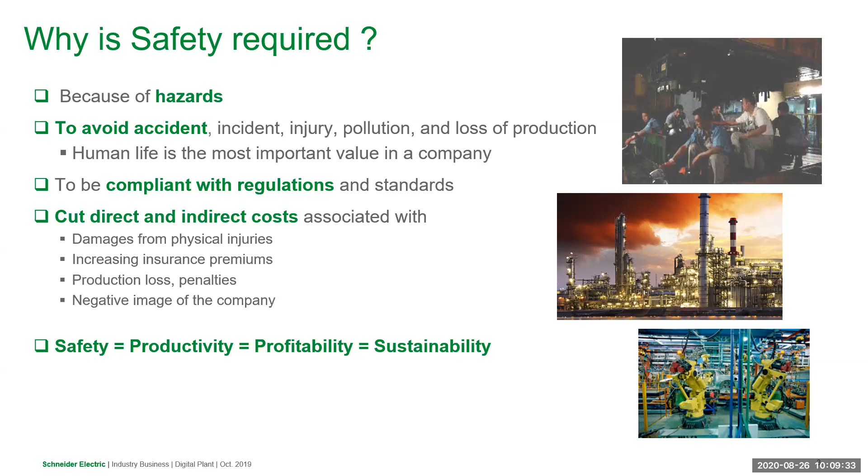More recently, in the last 15 years or so, risk analysis started to enter the equation. Monitoring systems were put in place to protect people and equipment, and these systems were external to the basic process and control equipment. That's how the concept of functional safety was really created.

As a general concept, functional safety is the part of the overall safety of a system or piece of equipment that depends on automatic protection operating correctly in response to its inputs or failing in a predictable manner. The objective of functional safety is freedom from unacceptable risk of physical injury or damage to the health of people, either directly or indirectly, through proper implementation of one or more automatic protection functions called safety functions, which is new terminology that we will be deeply covering during this presentation.

It is important to mention that functional safety is achieved when every specified safety function is carried out at the level of performance required for that safety function to be met. This definition triggers the following important definition: the safety-related parts of a control system.

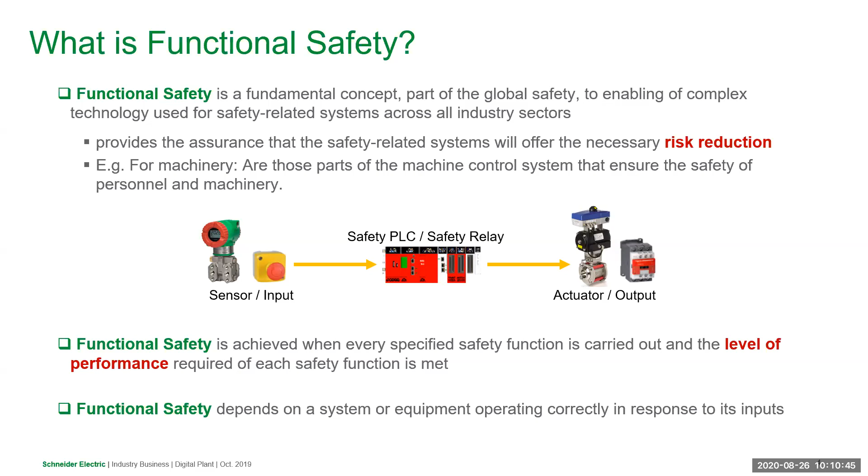The safety function will always consist of a function, a safety input device, a safety logic solver, and a safety output device or final control device. This is a must, this is always.

I want to comment here a little bit that I have seen in my experience in the market with different customers, talking about safety functions, mentioning safety related parts, and they are not always meeting this concept of the safety related parts. I have seen just an emergency stop, a really safety product, but going directly to a standard controller and having the actuator as a standard contactor, as an example.

And they are claiming, in some cases trying to claim, that there is a safety function around. Just by having standard products, in many cases, in all the cases, it is not achieving anything - they are not really meeting any standard for safety. They have an input which is safety, but they may have a logic that's non-safety and an output that's non-safety. If one of those pieces is not a safety product, not safety rated, they are not really achieving any safety rating in their safety solution.

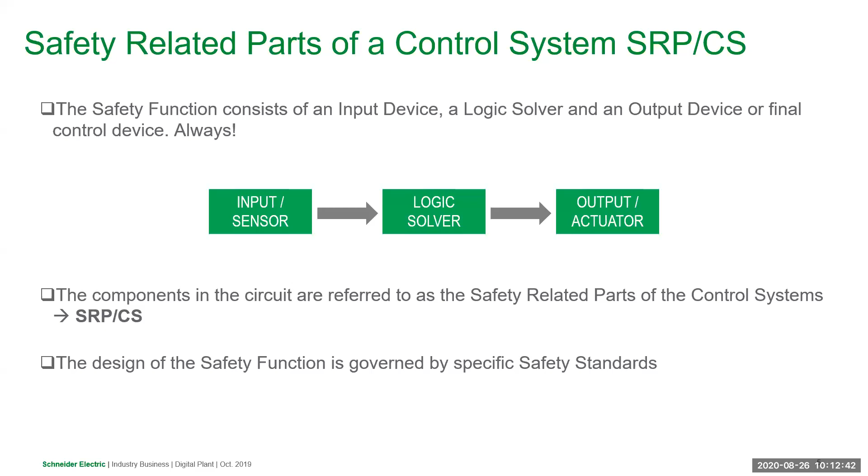Just as a comment, because I think it's important, and I have seen that - you will learn what is behind those safety components. So the components in the circuit are referred to as the safety-related parts of the control system, and the design of the safety function is governed by specific safety standards, which we will cover during this session.

So following with the presentation, I'm going to talk now about the standards, the safety standards, the functional safety standards. The standard is important - it lets everybody know and provides safety requirements. The standards provide guidance, guided by principles for design and integration of safety-related parts of control systems.

So in terms of safety standards, you can see on your screen the 61508, the IEC or EN 61508, which is considered a basic or umbrella standard for functional safety. It is a generic safety standard dealing with the functional safety of electrical, electronic, and programmable electronic systems, irrespective of the application. That is an important word here.

61508 is the main standard on the functional safety of control systems. So from 61508, used as an umbrella, we can see other different standards based on different applications.

Just by this presentation or webinar, I will concentrate on 13849, which is applied to all control systems, very applicable to machinery. But it's also important to highlight 61511, which is mainly focused on process, and 62061, which is also applicable for machinery, but it's used in SIL, which is safety integrity level.

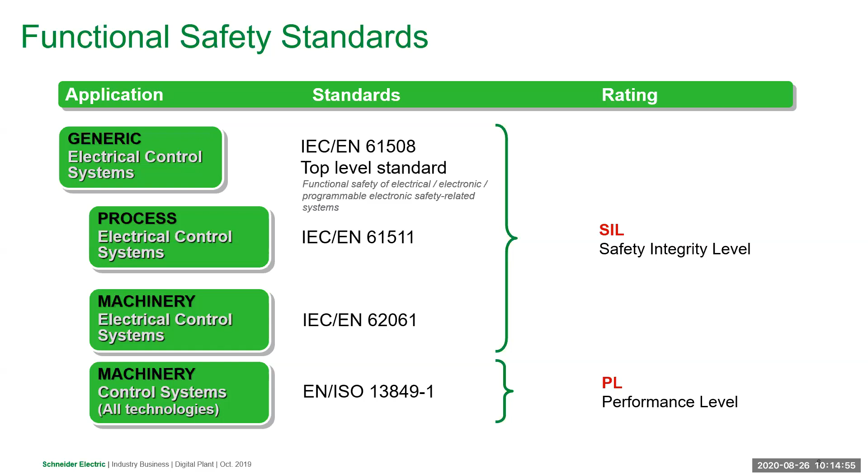So what is the difference? Let's start talking about the differentiation between process and machine safety.

If you work in a high-risk industry, it is very likely that you have heard the terms personal or machine safety and process safety. These types of safety measures have similarities, but they also have significant differences that are important to recognize when protecting the workforce. Process safety focuses on preventing fires, explosions, and accidental chemical releases in chemical process facilities or other facilities.

Dealing with hazardous materials such as refineries and oil and gas production installations. Machinery safety focuses on preventing employees from hazards, specifically coming from moving machinery. I will say that is the main differentiation, but both machine and process safety revolve around injury and hazard prevention, but on different scales. So hazards and risks are different, but the risk reduction methodology is pretty much the same.

For both, we go through the risk evaluation, which can be a risk assessment or hazard assessment. We have different types of risk evaluations. We go next to risk management, and after that we do the design, the testing, the operation, and the maintenance.

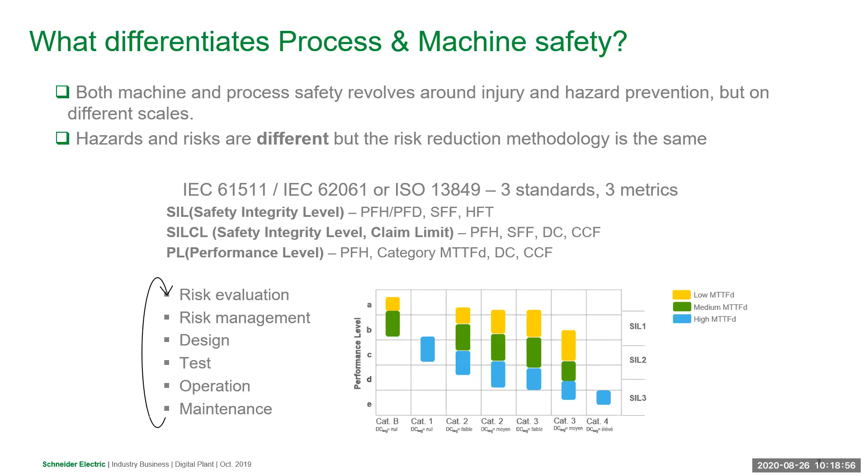That's why it is important to use safety products, because when you try to get some of this data from standard products, many times it is almost impossible to get it, because they are not built to comply with safety standards. That's why my recommendation on safety related components, if you want to build safety functions and you are talking about safety, is to go to standards and select safety components in order to get all this information.

So we have the two standards that I already covered, talking specifically about machine safety. If you recall, we have 13849 focused on performance level, and we have 62061 covering SIL. Both address the functional safety of machinery and control systems.

I will say the difference is that one will include other technologies than electrical, which is 13849, while 62061 is only used for electrical and process sector. That's why, in my experience, I have seen customers—and because 13849 is an international standard, I will say that 13849 is the most common or usual choice for many OEMs here in the US and other countries outside of Europe.

Even in Europe, in many cases, I have seen some OEMs building machines trying to comply with 62061, which is good, right? But they use the international standard. Now there are some harmonizations around the world, so the preference is to use 13849, the latest version of which was released in 2015.

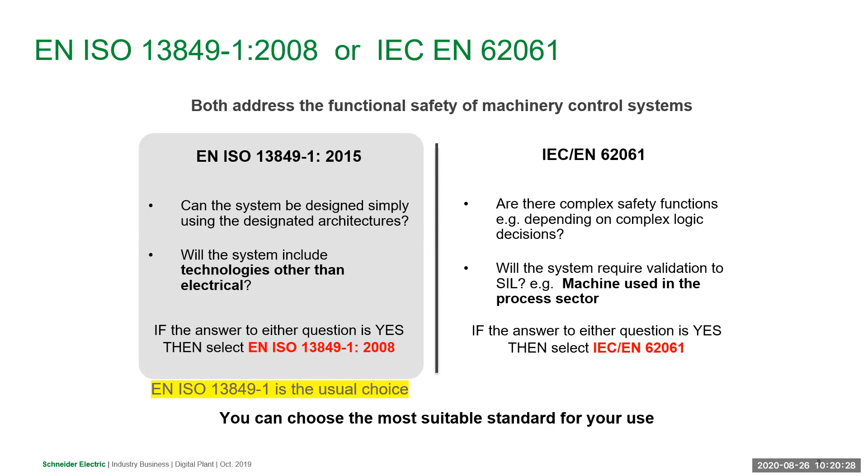Going back a little bit, in 2011, for those in the audience who remember, the safety standard EN 954, when we were talking about categories, this standard was valid until the end of December. Today this is an obsolete standard, but it's important to recall because it was the basis for the category portion in 13849.

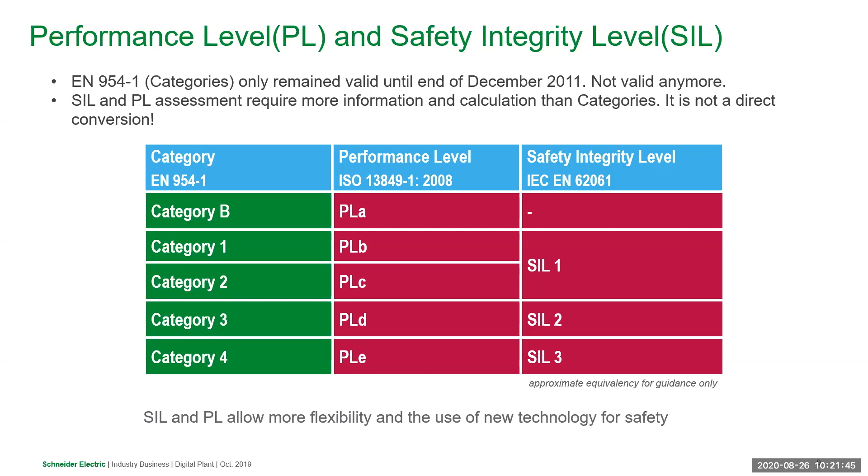EN 954 was replaced by safety integrity levels with 62061 and performance level by 13849. However, categories are still used. There is no direct equivalent to safety categories, and they require additional information and calculations that I will show. From here, I'm going to start talking about 13849, which is the usual global choice since it's an international standard.

We added three different requirements or components to achieve with 13849. One is what they call the mean time to dangerous failure. The other is diagnostic coverage, which is simply the ability of the system to detect dangerous failure. And finally, the common cause failure, a systematic fault that could affect both channels in a redundant system.

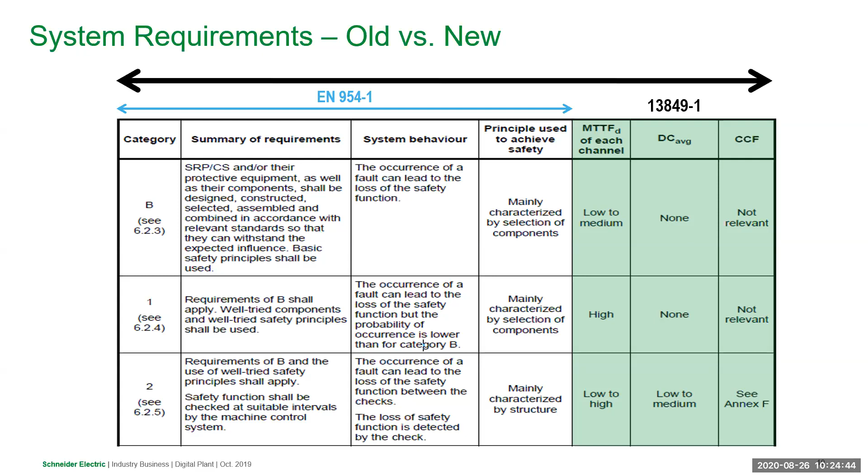So let's talk now about these additional requirements a little bit more in depth. This is the summary of the three additional components, as I just mentioned: the mean time to dangerous failure.

This is the portion of failure modes that can lead to failures that may result in hazards to personnel, environment, or equipment. In simple terms, it is the calculation of how often a piece of equipment or safety system fails in a way that threatens the safety of workers. This data is typically provided by the manufacturer.

I'll show you a summary in the upcoming slides where you can see all the details, but it's important to note that MTTFd is typically provided by the manufacturer in different ways. If you don't have the MTTFd as is, manufacturers typically provide other data that can be converted to obtain it, which is a requirement for the math calculations under 13849.

So MTTFd, the mean time to dangerous failure, is given in three different levels, as you can see: low, medium, and high.

It goes through different years. In terms of the failure, you will see theoretical figures quoted in some cases of 3,000 years in your calculations. But typically in calculations, these are capped at 100 years.

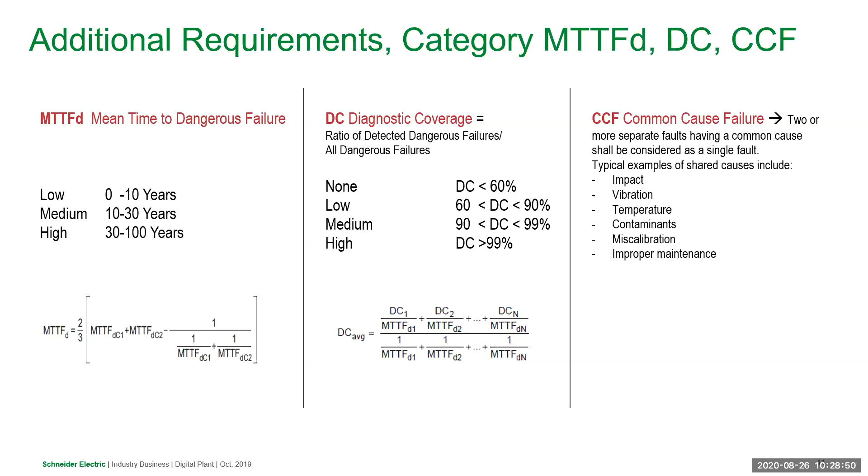As I just mentioned, I have this table. I think this is a very useful table for quick reference. This is a summary of the basic requirements of 13849, not including the category. This table includes the requirement, explains what it is, how it is applicable, how it is measured, and how we can get this information. So it is important to understand this if you are designing something under 13849. To really have a good understanding, more information is under this standard.

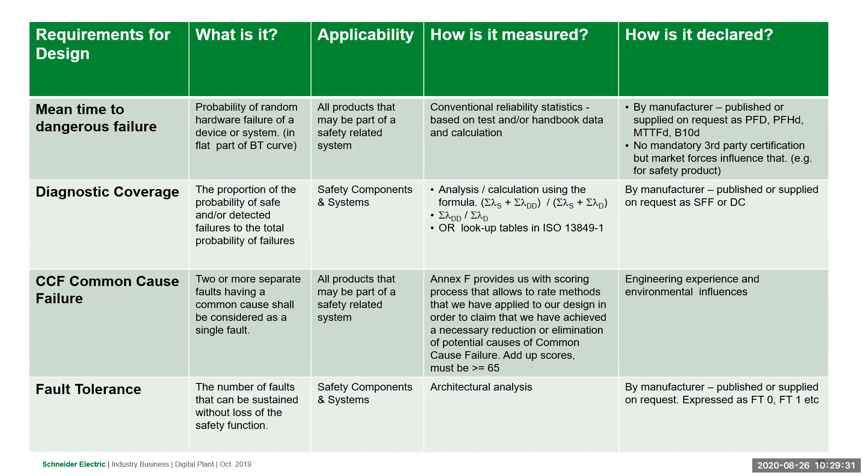So continuing with the presentation, now let's talk about the implications. As we just learned, 13849-1 encompasses more parameters to be considered based on reliability and time. But there is an important step in the safety life cycle, which begins with the identification of a risk or hazard.

There is an international standard for this, typically used, which is ISO 12100:2010, on safety of machinery. It covers general principles for design, and includes risk assessment and risk reduction. This standard specifies basic terminology, principles, and methodology for achieving safety in the design of machinery. It specifies principles of risk assessment and risk reduction to help designers achieve this objective. All of these principles are based on knowledge, experience of design and use, incidents, accidents, and risks associated with the machinery.

So risk assessment criteria is defined and mapped to required performance levels. Estimating risk involves evaluating many aspects, including severity of consequences, what are the chances, and what is the frequency of exposure. Severity is important - it's about how bad the injury can be. Frequency is about how often the worker is exposed to the hazard, and avoidance is about how likely one will avoid being exposed to that hazard. So risk assessment evaluates the potential hazard in order to determine the required performance level.

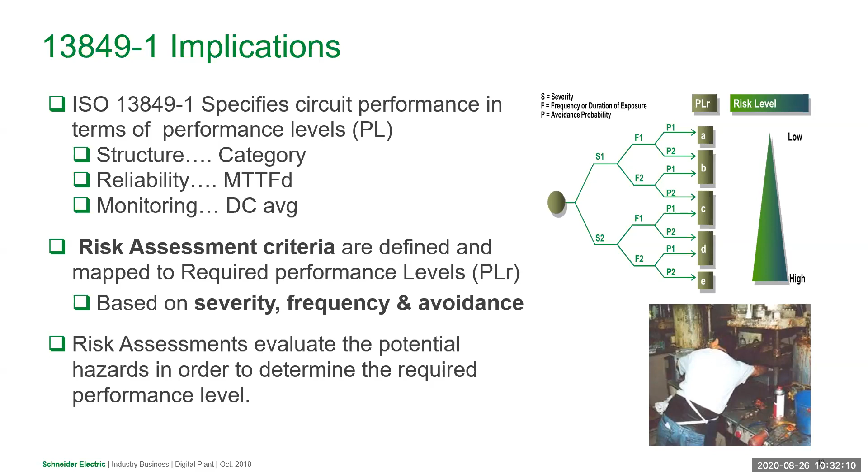As you can see in the graph, the three components under 13849 in a nutshell are severity, frequency, and avoidance. This mapping, which we will cover later, includes different levels of severity, frequency, and probability of avoidance that lead to different levels of performance level. As you can see, we have five, and all of them provide different levels of safety or risk, from low to high.

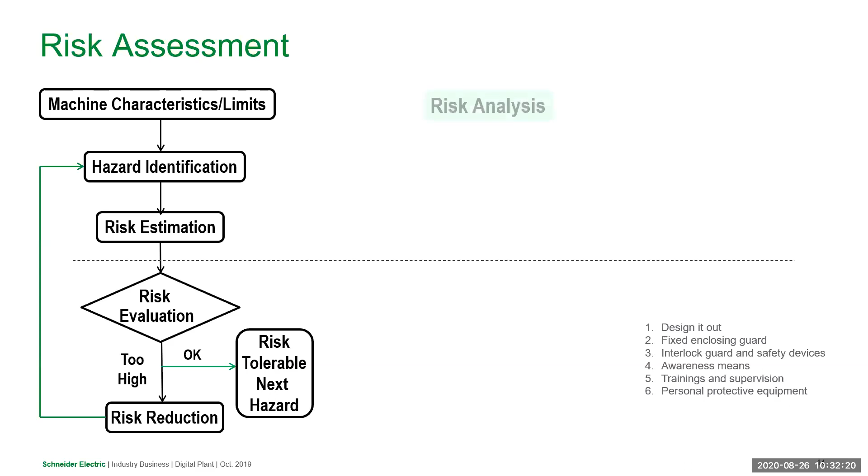So this is the standard flow chart for risk assessment. It typically starts with the machine characteristics or limits, the machine and the setup that assessment is for. As a comment, if any part of the machine, process, or energy source are modified, the risk assessment may need to be redone to ensure the proper risk reduction for the new configuration. So machine characteristics and limits is important, it's the first recognition of this process.

Then we go to the hazard identification, assuming there are no guards in place. This is when the team really starts doing task hazard analysis, looking at severity, frequency, and avoidance in order to determine the appropriate performance level requirement. Then we go to the risk estimation, and again here we look at severity, frequency, and probability.

The risk evaluation is when we apply the mitigation hierarchy. We'll talk a little bit about it, but it's specifically about the solution, which is based on the structure we just reviewed, the reliability and monitoring in order to confirm if the performance level is achieved.

If it is achieved, it is a tolerable risk, then we go to the next hazard in the machine. If it is not, we need to come back and start doing a deeper analysis in the hazard identification. Very simple process, but some recommendations: it's best to be team-based, and it can be applied to task hazard oriented analysis. It's important to do this in order to really determine the appropriate performance level.

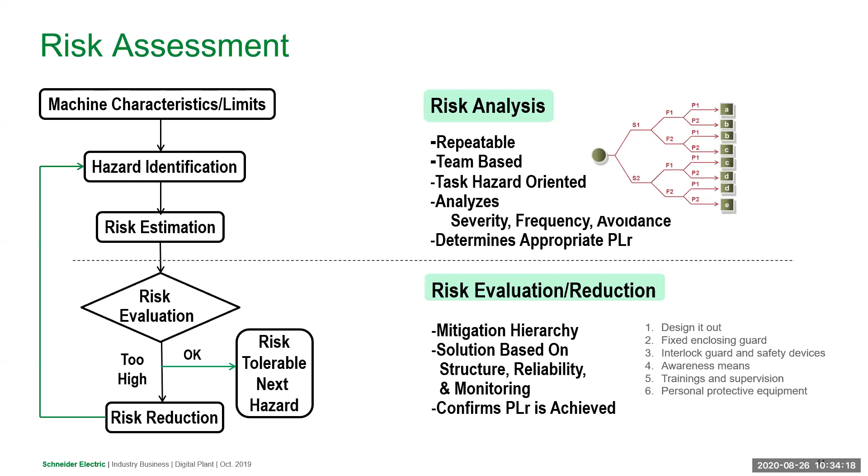There are different risk assessment models in the market today, and 13849 is just one of them. As I mentioned, it's international, harmonized to almost all the standards globally today. But if you are using one of them or the other ones, it's okay.

I think at the end of the day, you choose what is suitable for you, what you feel comfortable with. So if you are not shipping machines out of the country, if you are shipping machines locally, and if you are doing ANSI, that is fine. If you are using ANSI RIA, which is more for robots, that is fine too.

If you have the necessity to ship machines to Europe, for example, maybe 62061 is better for you, but you can use 13849 if that is better for you, if you are more comfortable. Performance levels are also acceptable in that continent.

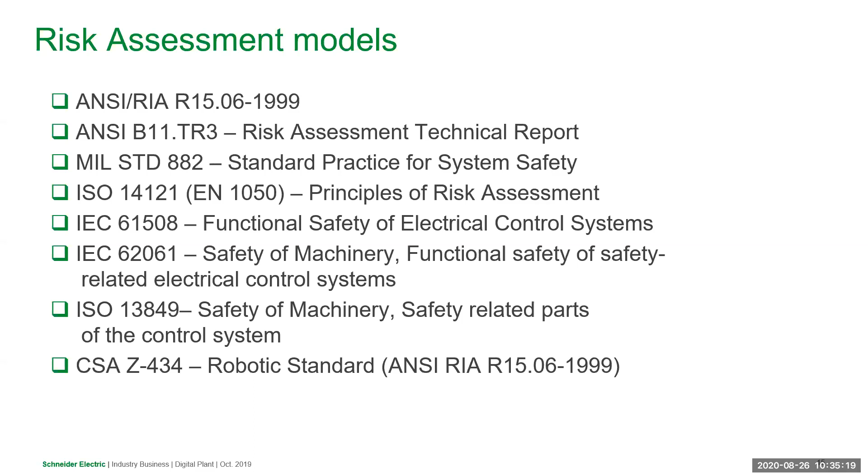We have been talking about risk assessment, but going back a little bit, I think it's important to clarify some key concepts. It is important, the risk evaluation and different models of risk assessment, but the concept is very key. It's about what is hazard, what is harm, and what is risk.

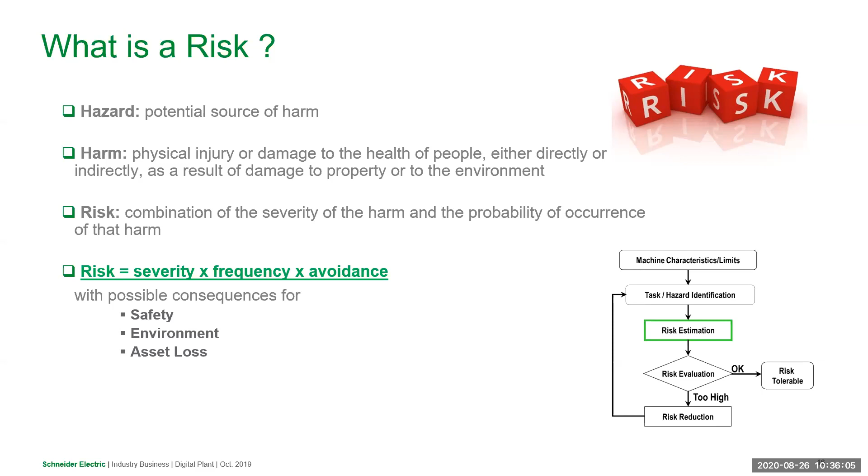Hazard is a potential source of harm. Harm is really a physical injury, and risk for safety is a combination of the severity of the harm and the probability of occurrence of that harm. So if you put that in different components, as I mentioned, it's around severity, frequency, and avoidance. We will talk about this.

So this is the mapping I just mentioned, this is the combination, this is the graphical representation I show here. But the severity has two different components or levels. I have the slight, which is something that can be considered reversible, and the other, an upper level, which is serious, the S2, which is non-reversible.

You can have an injury in your finger, an injury in your hand, an injury in your leg, which in many cases might not be reversible, but maybe something in your finger can be reversible. That's one example of having two different levels.

Frequency of exposure: frequency 1 is seldom or short time, and frequency 2 is frequent, really high frequency, maybe a long exposure. And with the probability, which is avoiding the hazard: P1 is really possible to avoid the hazard, or really scarcely possible to avoid the hazard, which is probability 2.

This informative information comes from one of the annexes in the standard, which typically allows suppliers and users to create their own terminology. So the one I just explained is just for the purpose of explanation. But when you go to the standard, it really gives you the opportunity to create your own groups of severity, your own levels of low and high severity, frequency, and probability.

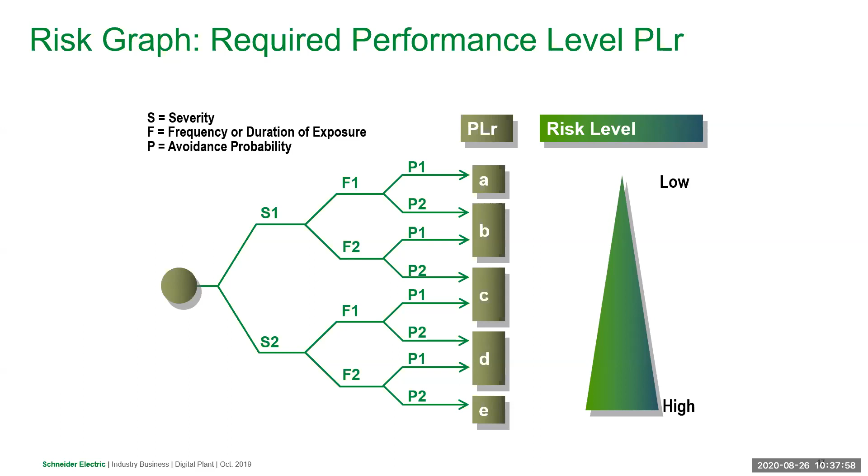This is an example of typical risk estimation, as you can see, with severity on the serious side. This is just a table from ANSI, just to give you an example. I took that from there, and they put, for example, frequent, non-frequent, likely, not likely, and explained the criteria.

Again, this is based on the risk assessment, and typically the expert, or people knowing about the standard, have a team base with the users of the machine, maybe also including people from the manufacturer of the equipment, or the system integrator that can participate in the design of the control, can be part of this risk estimation definition. I will say this is important because it really triggers the level of performance that we will build based on 13849.

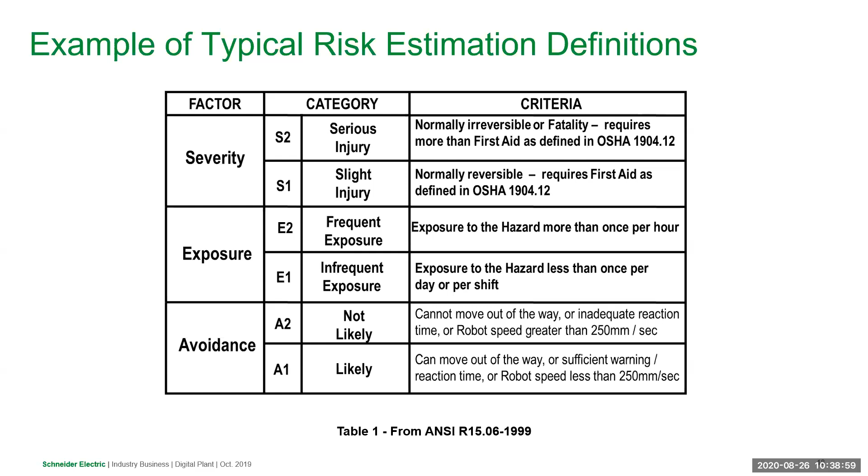I also included in this presentation an example. This is a mechanical automatic press. As you can see, this person typically moves his arm, puts something in the middle, and typically the press goes up and down, and they do that maybe 10 times per hour - consider that as an example.

So how severe could the injury be? Maybe it's really serious, right? Because if something is wrong, this person can lose his arm. What is the exposure to the hazard? It's frequent, right? 10 times an hour is too much. And maybe it goes to E2, and consider whether the hazard can be avoided - maybe not, because it's part of his job.

So then immediately you see it goes to the highest level of performance level. When we have the higher level of severity, the higher level of exposure, and the higher level of probability, it takes me to performance level E, which, if I would go to 62061, takes me to SIL 3 level, the highest level of safety.

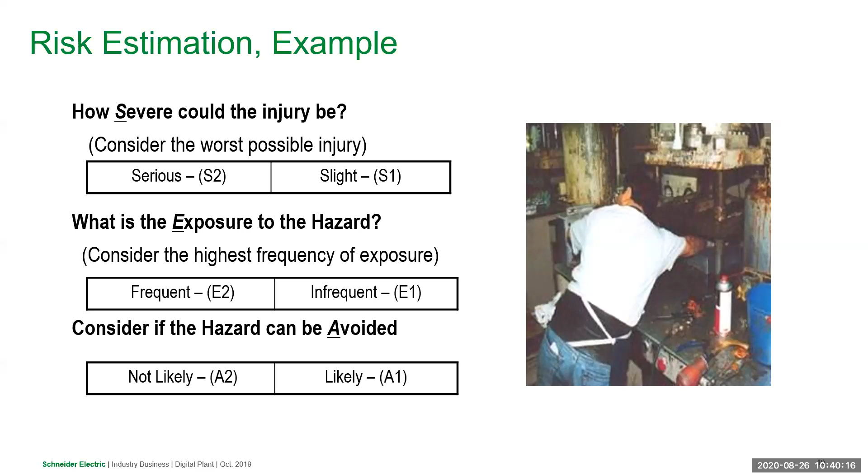So when applying safeguards, the approach of selecting appropriate measures is addressed through a well-recognized hierarchy, called the hierarchy of measures, or by many standards, the hierarchy of controls. The explanation of this approach deserves, believe me, a topic all on its own, and we don't have time during this session.

In summary, the concept of this approach is that different types of risk mitigation processes provide different levels of effective risk reduction. Therefore, the higher the risk, the more we focus on applying more effective risk reduction measures. So the philosophy is that a warning label would not typically, by itself, be an effective risk reduction measure for high risk hazards.

So as supported throughout this hierarchy, when you do the risk assessment, you have all these different measures of risk reduction. As you can see, in the third level we have engineering guards, devices, layers of safety. But above, some are done by design, and others just by hard guarding, that's it - we don't have people having access to that area. We avoid the hazard. But in many cases, we have people working with those hazards, where level 3 might be applied.

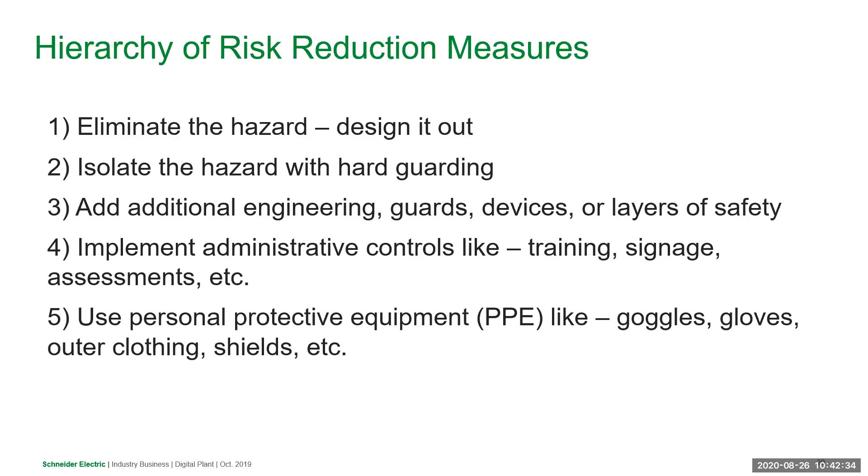Other different levels, like implementing administrative controls such as training, might be enough. Another option is using PPE, like goggles or gloves - that's gonna be good. Again, to me this is a specific topic that we can cover separately, but just so you know, as part of risk reduction, we have different levels of risk reduction.

So once we have the performance level required, once we've completed the hazard assessment and are sure that we're done, the next step is to build the safety system to achieve that. And as we learn, we take the international standards - this is what we're covering, the 13849. Typically what we have to start with is the category structure and the three additional components.

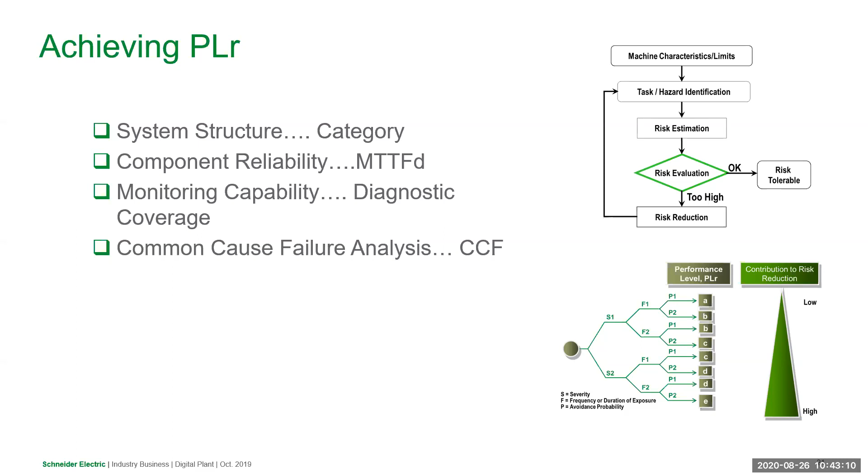What is that, right? First of all, for those of you that might be familiar with EN 954, these categories are really based on EN 954. We have Cat 1 and B, which are single channel, single fault, that can lead to the loss of the safety function. As you can see, we have the input, we have the logic, the output, but again, a simple fault can lead to the loss of safety function.

Cat 2 introduces a test element, and this test detects whether any fault is present. A single fault can lead to the loss of safety function between these tests, while Cat 4 and Cat 3 are dual channel or redundant. The only difference is the level of diagnostic coverage that it requires in order to detect accumulation of faults, which is what we have in Cat 4.

But if you can see, this is the structure. Even though EN 954 is obsolete, 13849 took that as the basic concept of the structure of the categories.

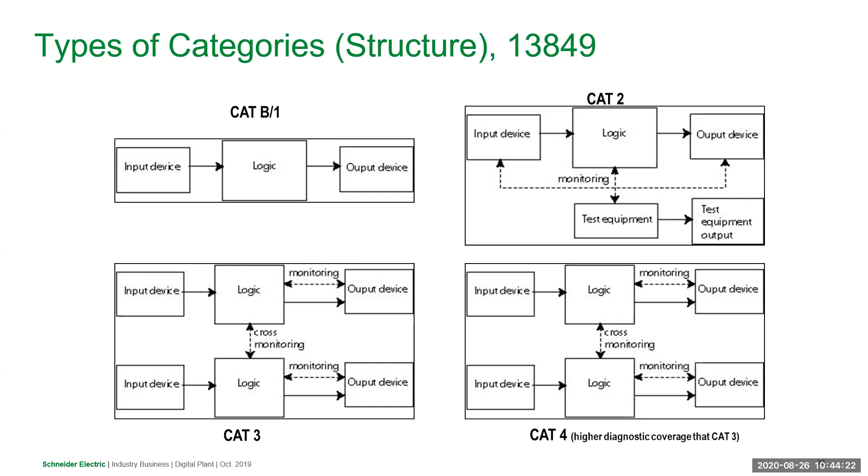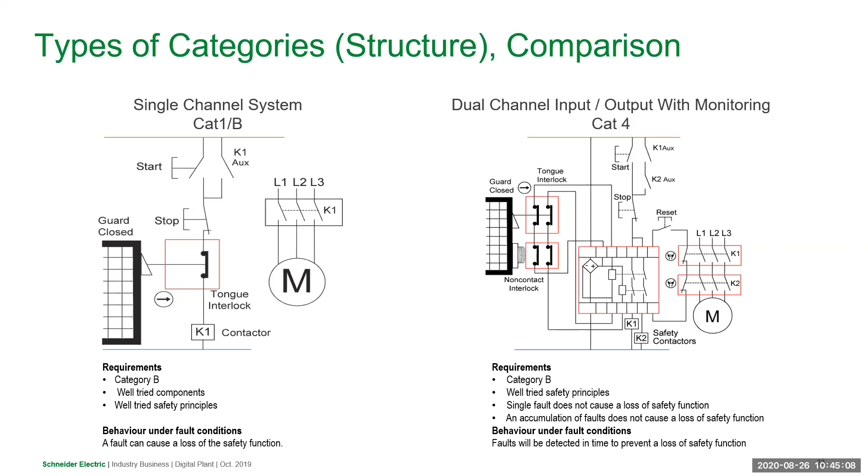This is just to give you a more realistic electrical diagram when we build single channel Cat B or dual channel Cat 4. Then we move to the other three different components. We collect the data, as we just mentioned, from the vendor, from the manufacturer, the MTTFd, and we also get the diagnostic coverage. Remember, the common cause failure is also something that is based on experience, and really one of the annexes for 13849 can give you guidance in order to meet the 65 points.

So when you open the 13849, it really takes you through how to do the calculations, how to get the data. If you get the data from manufacturers in one way, what are the typical formulas to convert it to MTTFd? The same applies for diagnostic coverage.

But one of the good recommendations I can provide you is that today in the market, you can find different safety software tools. And one that I recommend, and I will show you in the next couple of slides, is the one we call SISTEMA. SISTEMA is a free software, really free, and you can download it from a link, and we'll show you that. It will help you avoid doing your own math, which can really take you time, and you can get it from there.

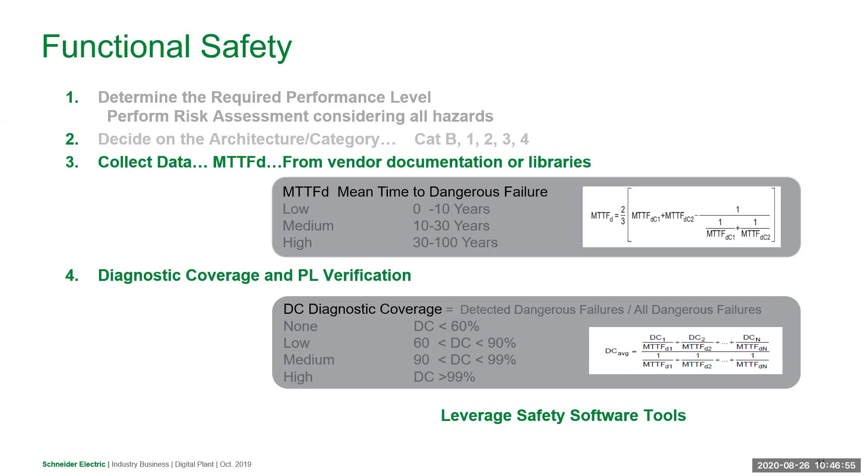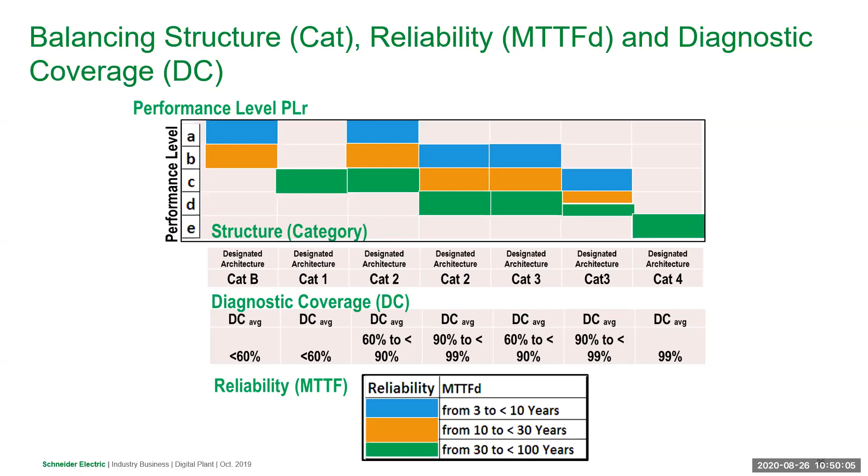So use it, my recommendation. You're going to reduce your time and effort working on this and to really understand, or make sure, that you are going to achieve with that system and with those components the performance level that is required based on your hazard or risk assessment.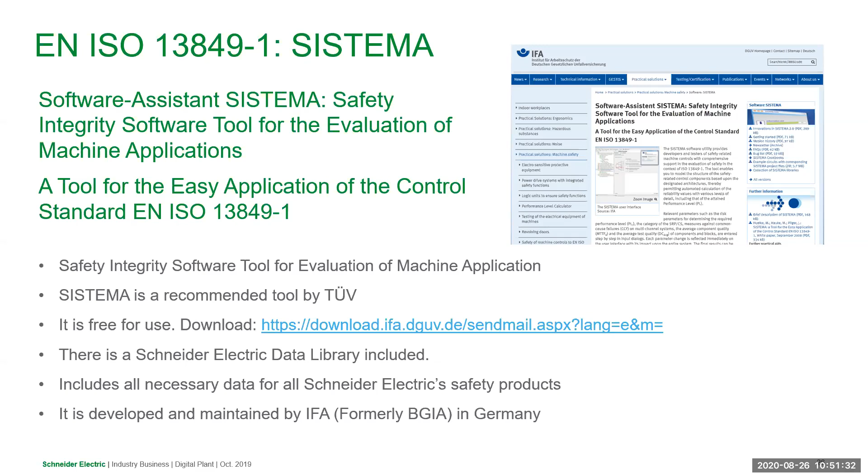So now, talking about our products for Schneider, it's important for the audience to know that we are very good in terms of the components we offer in the market. We are very, very well recognized for process safety.

We have products and we are #1 in many cases, for example with Triconex, very process safety oriented applications. But I wanted to let the audience know, don't forget, our products and controllers are really good and can be used and are approved also for machine safety.

We have safety inputs from safety interlocks, safety light curtains, safety switches - non-contact and contact, emergency stop, safety limit switches, cable pull switches. We have a variety with different technologies of safety inputs. Remember, it's part of functional safety, you have to use safety components.

And you have safety logic at different levels. We have safety relays, modular safety relays, safety PLCs with integrated motion. And we have, something I will talk to you about, the EPAC for standard safety and process safety control, which is pretty good. I'm gonna cover a little bit about it.

And also important, we have safety outputs from safety contactors, going through the safety drives, and also through safety motion control. I will say use it again - we have the people, we have the knowledge, we have the product, we have the tools in order to go through 13849, if that is the one you are going to use, to build your safety solutions with Schneider Electric.

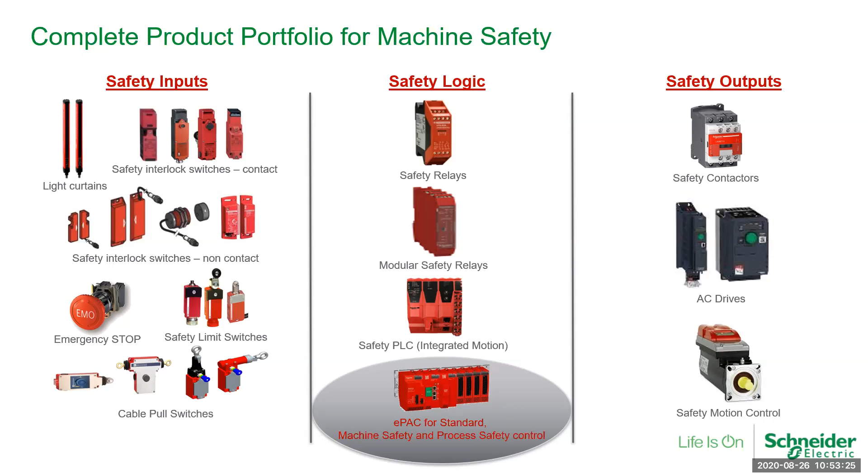Also, talking about the EPAC, one of the key differentiators is that the EPAC, the M580, I will call it a common safety solution, because it can be used for process and machine safety. For machine, we can comply with all the standards and we can work with all of these components, input and output.

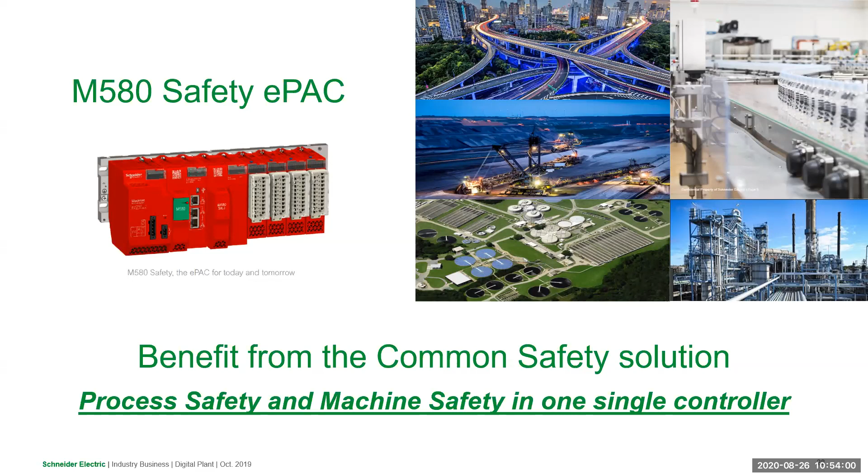Our controller is also enabled with cybersecurity, which is one of the trends recognized in the market today. And also, the M580 safety PAC is SIL 3, SIL 3 PLE, if you remember.

It can achieve up to SIL 3 PLE, SIL claim limit 3 by 62061, SIL 3 by 61511, and PLE by 13849-1, for process and machine safety. It also complies with specific standards for fire and gas, emergency stop, and some BMS. When I talk about process, it's real process, right? It can be suitable for process safety applications.

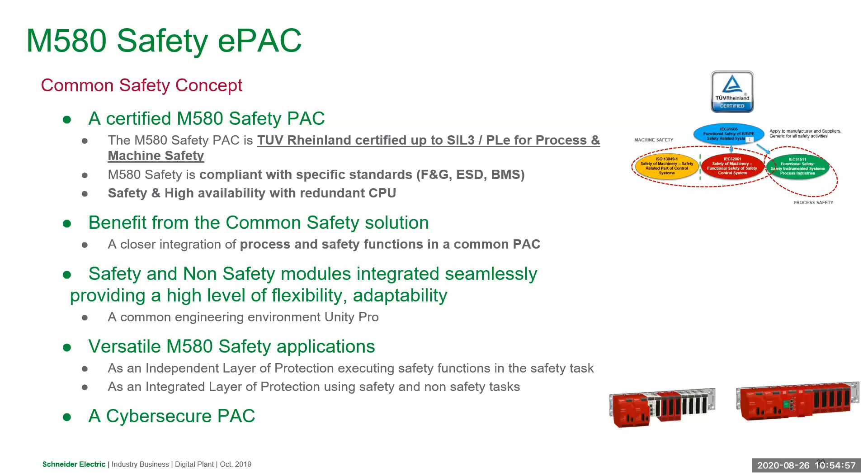One of the key differentiators we have in the market is that it does safety as a standalone and supports high availability with redundant CPUs. Something that is unique in the market. I really encourage you to use it. We have other different values.

This is the safety IOs, the redundant safety and power supply, and the X80 IOs for safety and non-safety in the same engine, and also the control expert, where you can do your programming using different languages like structured text, function blocks, and ladder. I think that is one of the key differentiations we have in the market.

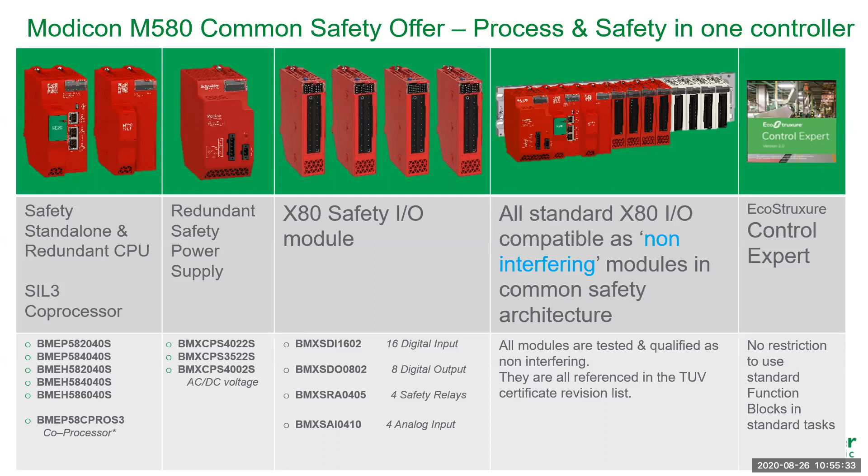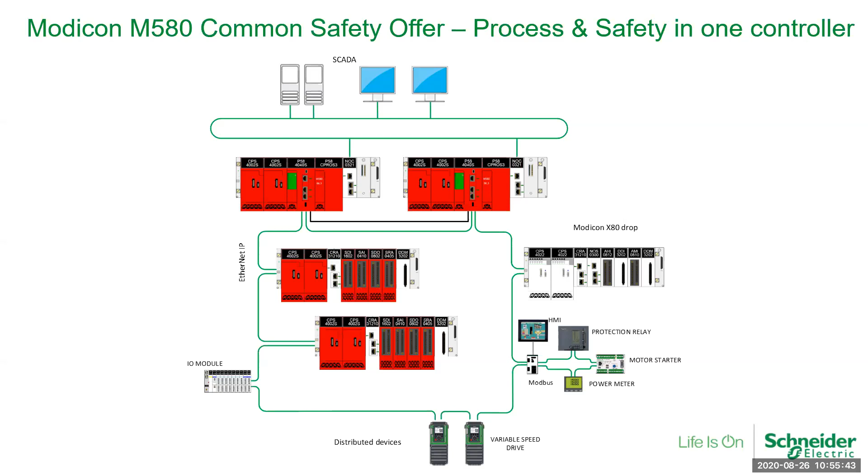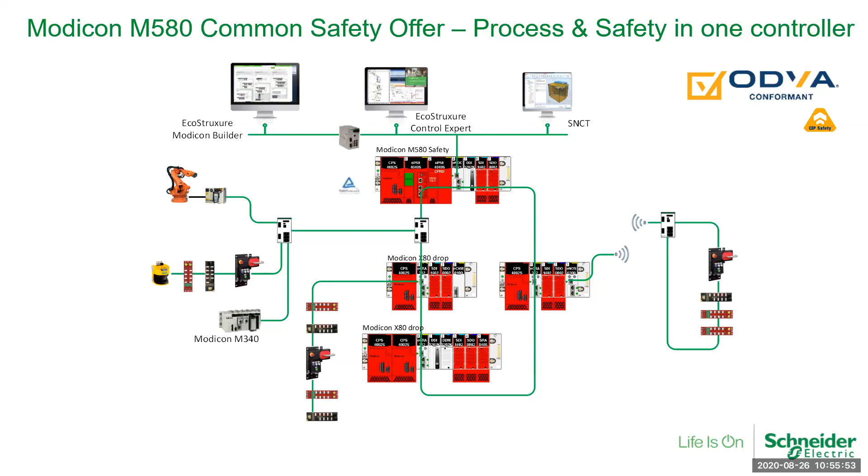This is just for your reference, process and safety in one controller. Something I have seen competitors cannot do, take advantage of it, same controller for different applications. Also, as I mentioned, CIP Safety open with conformity with ODVA that can support other safety products.

It's important to put you in the concept of the Triconex and M580. Triconex is very, very focused on critical processes where we are leaders, and also discrete applications when we have the M580, and high available process when we have both.

Again, take advantage of it. Those are really cool products, and we have the knowledge, the experience, and the people to support the product and the technology to support your safety systems.

In summary, safety systems encompass parameters to be considered based on reliability and time. Safety systems in machinery are rated in SIL by 61508 or performance level by 13849. Manufacturers publish the SIL limits, performance levels, and all these values when there is a safety product. 13849 is the most common, because it is an international standard, which is what I've seen in the market.

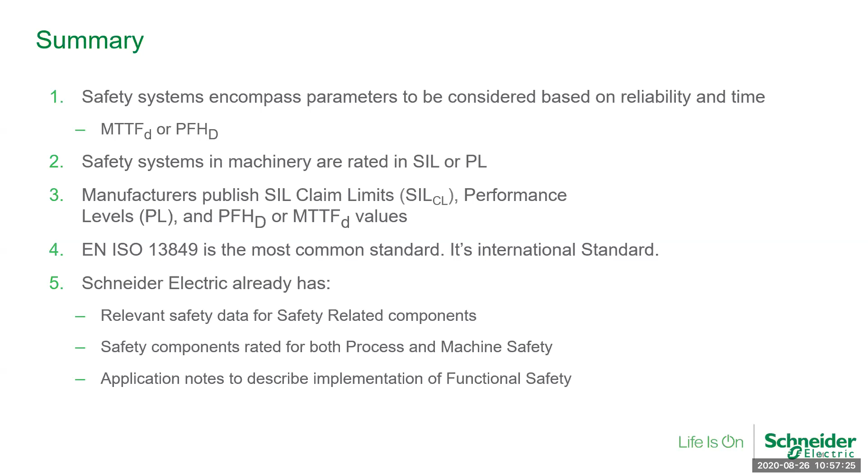Schneider Electric has relevant safety data for safety rated components, for both process and machine. We also have application notes, and we can take you through all of these different tools that we have in order to implement your functional safety.